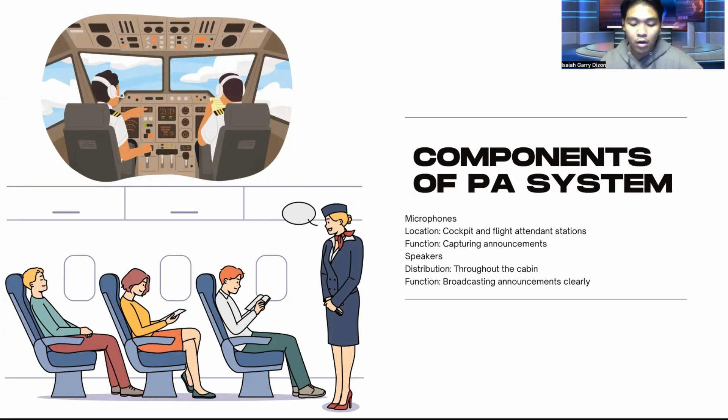Control panels are another vital component. Located at the crew station, these panels allow the crew to manage announcements and direct them to specific areas or the entire aircraft as needed.

Next is the functions of the PA system. The PA system serves multiple functions on board. Routine announcements include flight information such as estimated time of arrival and weather updates at the destination. Safety announcements are crucial, providing pre-flight safety briefings and instructions during emergencies. Operational announcements help with boarding and disembarkation and also facilitate coordination among crew members during the flight.

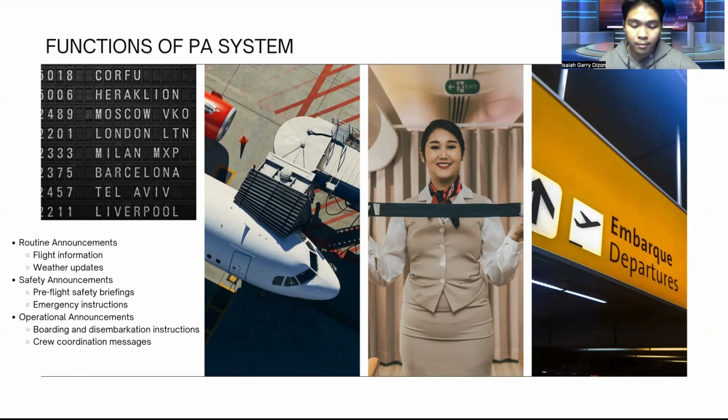Next is what are the benefits of the PA system? The benefits of the PA system are manifold. In terms of safety, it allows for timely and clear communication, which is vital in emergencies. For passenger comfort, regular updates and information help keep everyone informed and at ease during the flight. Operational efficiency is also enhanced as the PA system enables smooth coordination among the crew.

What is the interphone system? Interphone systems in aviation are integrated communication networks used within an aircraft to enable clear and effective communication among the flight crew, cabin crew, and sometimes ground personnel. These systems are essential for coordinating various aspects of flight operations, ensuring safety and managing both routine and emergency situations.

So why do interphone systems matter? Interphone systems matter because of safety and emergency management, crew communication, passenger safety and comfort, and redundancy.

So how does the interphone system work? In activation and use: initiating a call, crew members use the control panel to select the desired communication channel, for example cockpit to cabin. Next, speaking and listening: the crew member picks up a handset or uses a headset to speak, and the voice is transmitted through the system to the intended recipient.

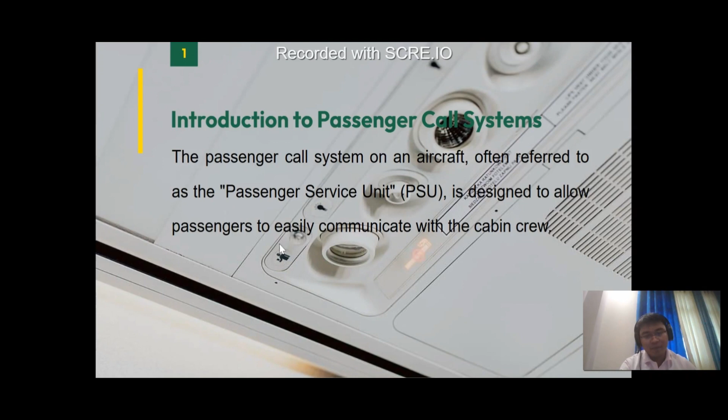As you can see on the panel in the background, right there is the passenger call button. So the main component of a passenger call system is mainly the call button, which is located on the overhead panel above each passenger's seat, as you can see here, this one and this one.

This button, when pressed, alerts the cabin crew that a passenger needs assistance. Along with it, while being pressed, is the indicator light, which is often illuminated in a central panel, mostly in the galley or other strategic locations of the aircraft to alert the flight attendants. These locations may vary with the size of the aircraft. In some aircraft, an audio alert also comes along with the indicator light, making it easier for flight attendants to notice that someone needed assistance.

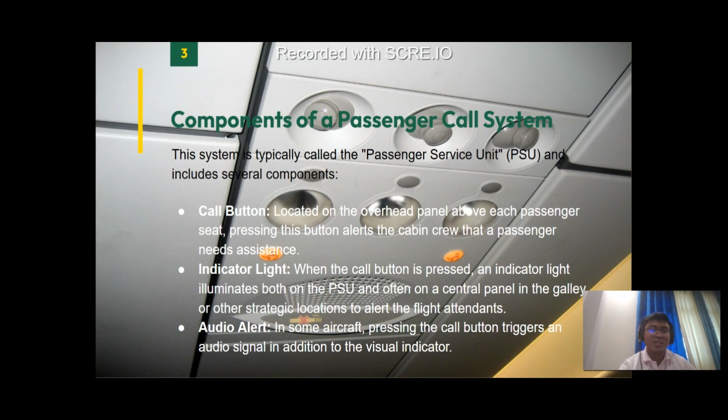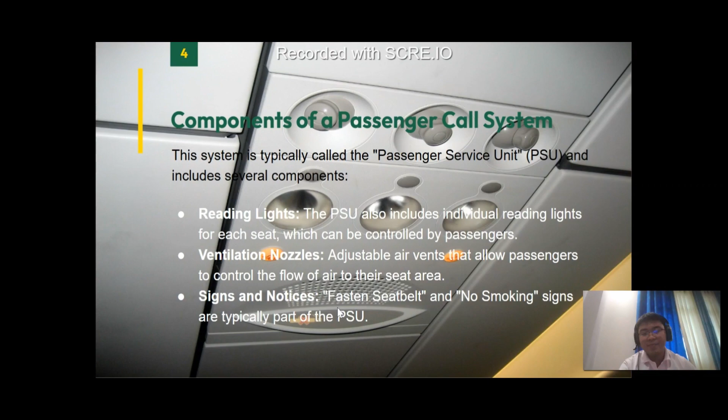It also comes along with reading lights. As you can see here, there are three reading lights in this panel above, followed by ventilation nozzles. As we can see, there's three. And signs and notices, mostly the fasten seatbelt and no smoking signs, as you can see at the back, which are mostly controlled by the pilots in the cockpit.

Its functionality is designed for ease of use by both passengers and crew, basically pressing buttons and adjusting it by hand. Upon pressing the call button, an indication light near the passenger seat illuminates. Simultaneously, a signal is sent to the cabin crew's notification panel, where the crew can identify the exact seat from which the call was made, making it easier for the flight crew to know exactly where assistance is needed.

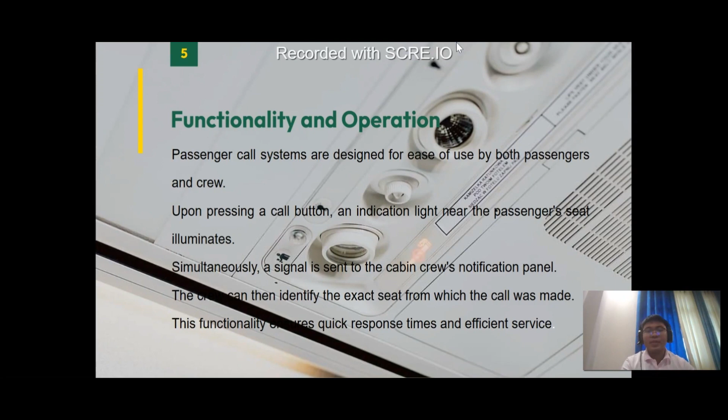That's all for the passenger call systems, and now we will head to the in-flight entertainment system.

What does the cabin communication and in-flight entertainment, or IFE, system connection have? The question is, when it comes to integration, how does it work? The cabin communication system interfaces with the IFE, displaying real-time flight information, safety instructions, and service updates on passenger screens.

Another question is, how does this benefit the passengers? The IFE provides entertainment like movies and music and keeps passengers informed with announcements from the crew.

What about operational efficiency? The crew uses the communication system to manage passenger requests, which are tracked through the IFE for timely service. To ensure system safety, safety announcements and emergency instructions are delivered through the communication system, with visual aids on IFE screens.

How have modern advancements improved these systems? Modern aircraft use wireless networks to link both systems, allowing for easy updates and personalized content for passengers. Overall, this covers how the cabin communication and IFE systems work together to provide a seamless, informative, and enjoyable in-flight experience using safety and efficiency systems.

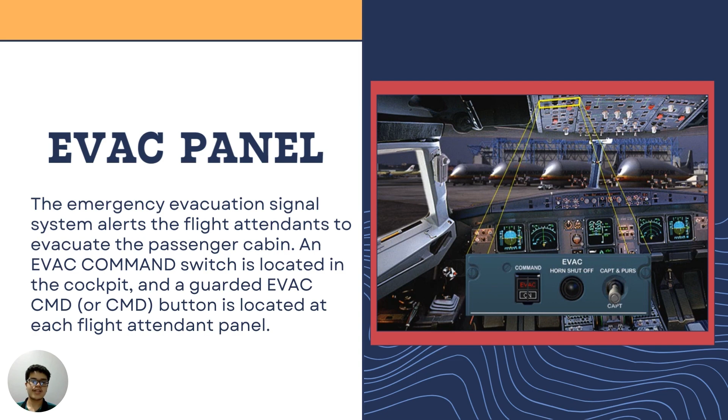For this topic, I will discuss the emergency communication systems. Let's start off with the EVAC panel. The EVAC panel is an emergency signal system that alerts the flight attendants to evacuate the passenger cabin. An EVAC command switch is located in the cockpit, and a guarded EVAC CMD button is located at each flight attendant panel. So the evac panel can be located both in the cockpit and in the cabin. For the cockpit, it's at the overhead panel, and for the cabin, it's at the forward flight attendant panel near the emergency exits.

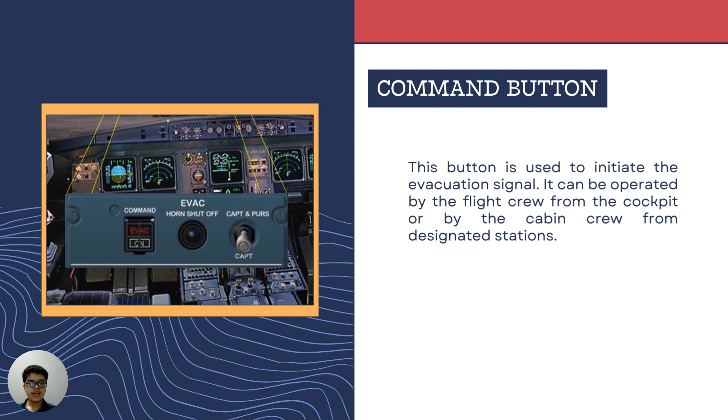Let's dive deeper into the evac panel. We have the command button, used to initiate the evacuation signal. It can be operated by the flight crew from the cockpit or by the cabin crew from designated stations. When you push this command button, a sound will be produced both from the cabin and the cockpit, alerting the flight attendants to initiate an evacuation from the cabin.

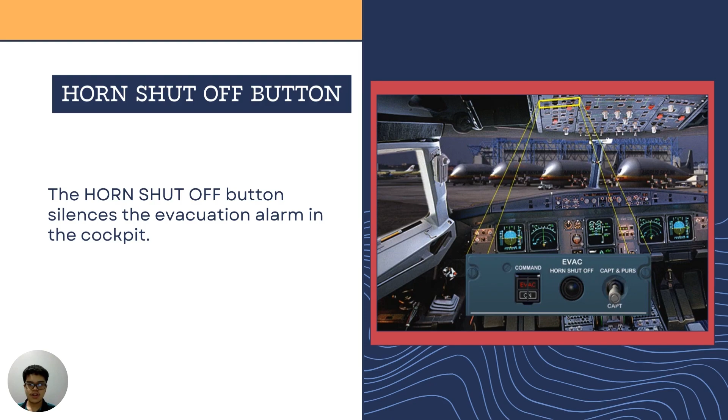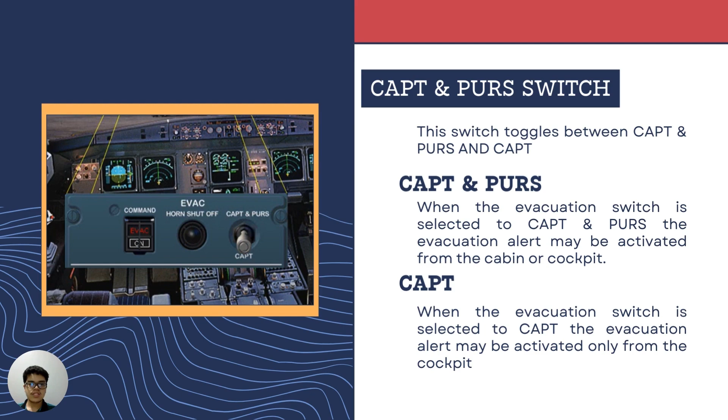Next, we have the horn shut-off button, which silences the evacuation alarm in the cockpit. Lastly, we have the CAPT and PURS switch, a toggle switch between CAPT/PURS and CAPT. When the evacuation switch is selected to CAPT/PURS, the evacuation alert may be activated from either the cabin or the cockpit. But when toggled only to CAPT, the evacuation alert may only be activated from the cockpit. That summarizes the evacuation panel and its use as an emergency communication system.

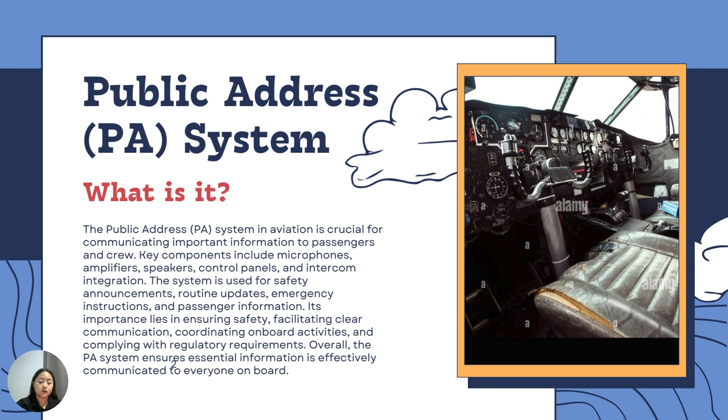Communication is vital in aviation for smooth operations and safety. This presentation explores the public address system and general communication system, detailing their components, functions, and importance in modern aircraft. The public address system enables announcements to passengers and crew. It includes microphones, amplifiers, and loudspeakers, working together to ensure clear communication throughout the aircraft.

The functions of the PA system: the primary functions include delivering safety announcements, providing flight information, and facilitating crew coordination. For example, in case of an emergency, the PA system is used to give passengers instructions on what to do. This is also used for routine updates such as boarding and disembarkation information.

Next, we'll look at the general communication system. This system facilitates both internal and external communication. Key components include the interphone system for internal communication, and VHF/HF radios and satellite communication.

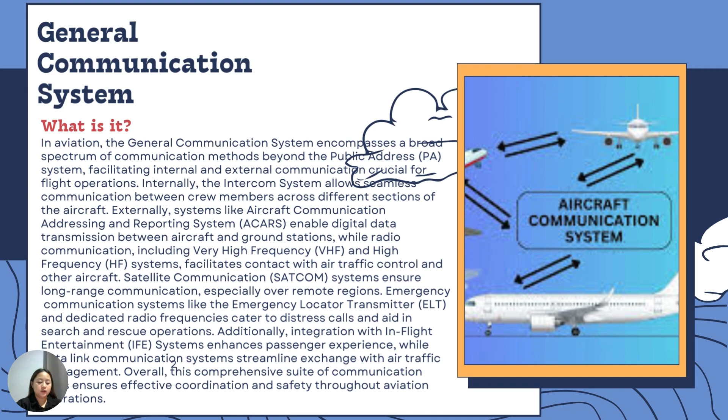In conclusion, the public address and general communication systems are vital components of modern aircraft, ensuring effective communication and safety. As technology continues to advance, these systems will become even more integral to aviation operations. Thank you for listening.